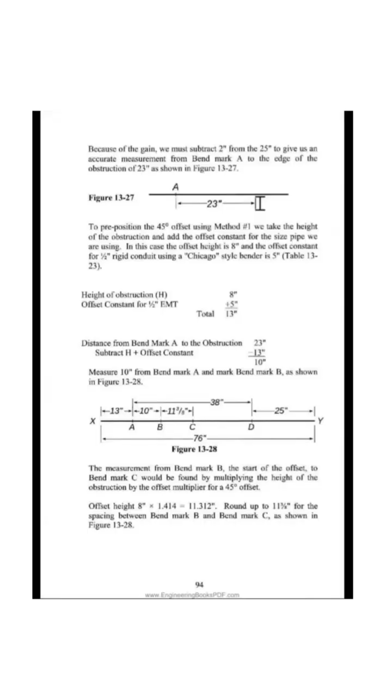Height of obstruction, h, 8, plus offset constant for 1/2 EMT, 5 inches, total 13 inches. Distance from bend mark A to the obstruction is 23. Subtract h plus offset constant, minus 13 inches, equals 10 inches. Measure 10 from bend mark A and mark bend mark B, as shown in figure 13-28.

The measurement from bend mark B, the start of the offset, to bend mark C would be found by multiplying the height of the obstruction by the offset multiplier for a 45 degree offset. Offset height 8 inches by 1.414 equals 11.312. Round up to 11 3/8, for the spacing between bend mark B and bend mark C, as shown in figure 13-28.

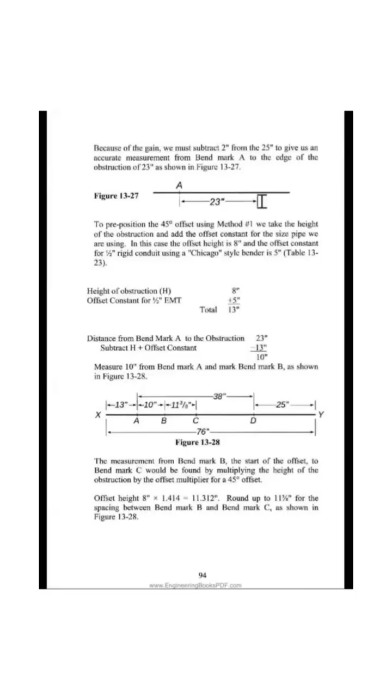To locate bend mark D, it will be easiest if we use mark A as a reference. The back-to-back measurement from the back of the first 90 degree bend to the back of the second 90 degree bend is shown in figure 13-24 as 37.

Between bend mark A and D there is one 90 degree bend and an offset. For the 90 degree bend we will subtract 2 inches for gain, but then we must add shrink for the 8 inch offset. Shrink for the 8 inch 45 degree offset would be 8 by 3/8, equals 24/8, or 3, for total shrink.

37 inches back-to-back distance, plus 3 shrink equals 40 inches, minus 2 inches gain equals 38 inches distance from bend mark A to bend mark D, as shown in figure 13-28.

We can, and should, always double-check our measurements before bending the pipe. The best way is to work backwards, or from the opposite end that we originally measured from.

Starting from box Y, the measurement to the back of the 90 degree bend is 22 inches plus 5 inches for take-up, then minus 2 inches for gain, or 25. From the end of the pipe at Y to bend mark D, as shown in figure 13-28.

From D to A, as shown in figure 13-28, is 38. Add 38 inches to 25 inches for a total of 63 inches from the end of the conduit at point Y to bend mark A.

From A to box X is 18 inches minus 5 inches of take-up, or 13. Add the 13 inches from X to bend mark A to the 63 inches measurement for bend mark A to the end of the conduit at Y, for a total length of 76, which was the calculated total length.

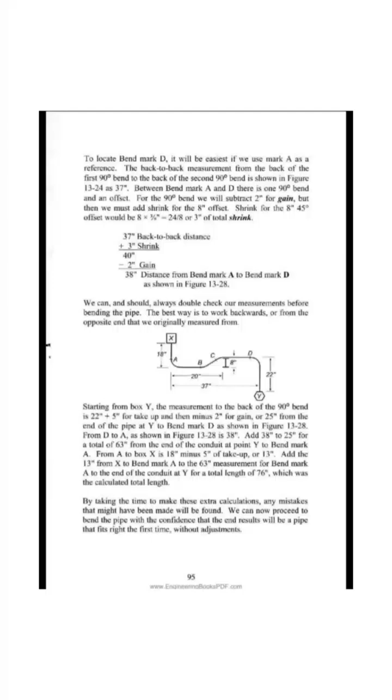The next problem will have a 4-bend saddle and two 90 degree bends. As with offsets, method #1 must be used for push-through bending 4-bend saddles. If necessary, review Chapter 9 for pre-positioning 4-bend saddles using method number 1. Lay out the pipe as indicated in figure 13-29.

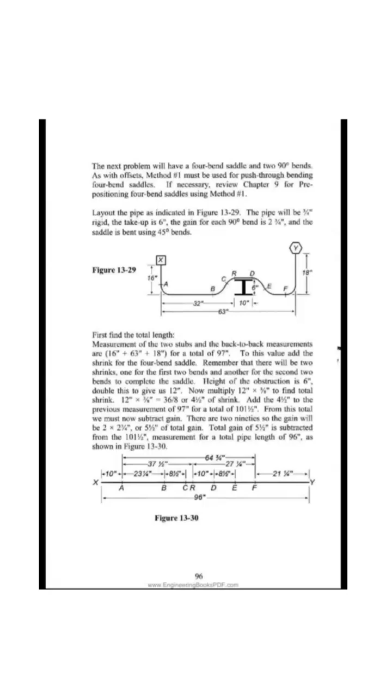The pipe will be 3/4 rigid, the take-up is 6 inches, the gain for each 90 degree bend is 2 3/4, and the saddle is bent using 45 degree bends. First find the total length.

Measurement of the two stubs and the back-to-back measurements are 16 plus 63 plus 18, for a total of 97. To this value add the shrink for the 4-bend saddle. Remember that there will be 2 shrinks, one for the first 2 bends and another for the second 2 bends to complete the saddle.

Height of the obstruction is 6 inches, double this to give us 12. Now multiply 12 inches by 3/8 to find total shrink. 12 inches by 3/8 equals 36/8, or 4.5 of shrink.

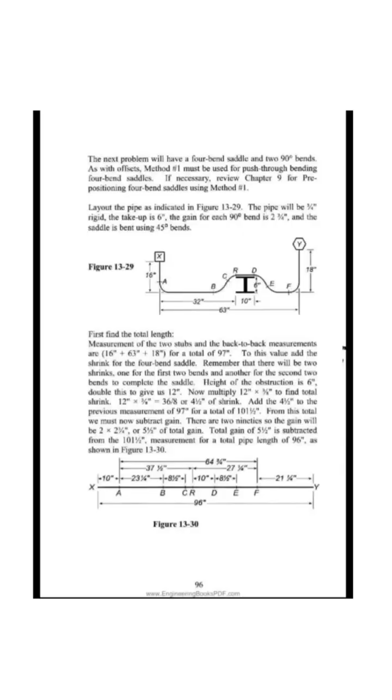Add the 4.5 to the previous measurement of 97 inches for a total of 101.5. From this total we must now subtract gain. There are 2 90s, so the gain will be 2 by 2 3/4, or 5.5, of total gain. Total gain of 5.5 is subtracted from the 101.5 measurement for a total pipe length of 96 inches, as shown in figure 13-30.

To locate bend mark A, subtract the take-up of the bender, which was given at 6 inches, from the desired stub length of 16.

16 inches minus 6 inches equals 10. The distance from the end of the pipe at box X to bend mark A is 10, as shown in figure 13-30. The distance from A to B, from A to the back of the bend, is 6 inches, take up minus 2 3/4 for gain.

6 minus 2 3/4 equals 3 1/4. The edge of the obstruction is 32 inches from the back of the bend. By adding the 3 1/4 to the 32 inches, we have a measurement of 35 1/4. That represents the distance from bend mark A to the edge of the obstruction.

35 1/4 minus 12 inches equals 23 1/4. This is the distance from bend mark A to bend mark B, as shown in figure 13-30A.

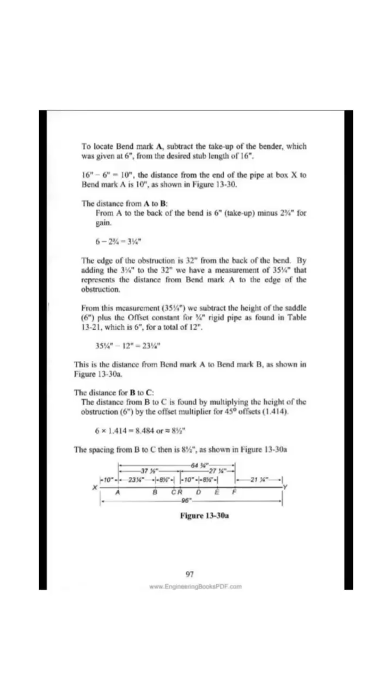The distance from B to C is found by multiplying the height of the obstruction, 6 inches, by the offset multiplier for 45 degree offsets, 1.414. 6 times 1.414 equals 8.484, or 8.5. The spacing from B to C then is 8.5, as shown in figure 13-30A.

The distance from A to R: previously we located the edge of the obstruction from bend mark A, which was 35 1/4. If we add the shrink for the first two bends of the saddle to 35 1/4, we have located reference mark R. The shrink is the height of the obstruction, 6 inches, multiplied by 3/8, equals 18/8 or 2 1/4. The distance from A to R then is 35 1/4 plus 2 1/4, equals 37 1/2, as shown in figure 13-30A.

Distance from R to D: this will be the width of the obstruction. The obstruction is 10 inches wide, so the distance from R to D is 10, as shown in figure 13-30A. Distance from D to E will be the same measurement as B to C, 8.5, as shown in figure 13-30A. Now locate bend mark F.

Bend mark F may be located from A, or from R to F. The back-to-back measurement for the two 90s is 63. It is 32 inches from the back of bend A to the edge of the obstruction, so it must be 31 inches from the obstruction to the back of bend F, as shown in figure 13-29.

If we add 2 1/4 of shrink for bends D and E to 31 inches, we get a measurement of 33 1/4. All we need to do now is subtract 6 inches for take-up from 33 1/4 to get a measurement of 27 1/4 from R to F, as shown in figure 13-30A.

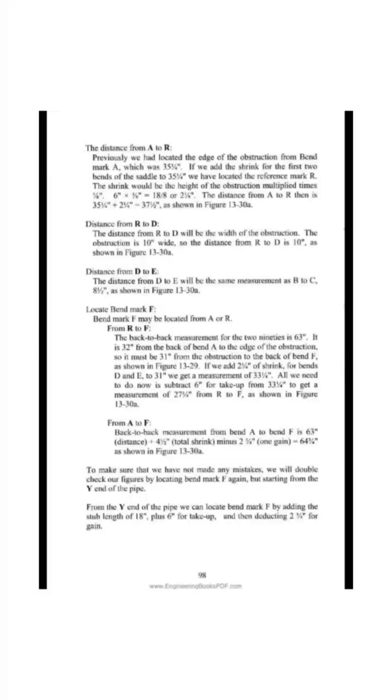18 inches plus 6 inches equals 24. 24 inches minus a gain of 2 3/4 equals 21 1/4. From the Y end of the pipe to bend mark F will be 21 1/4, as shown in figure 13-30A.

Adding this measurement, 21 1/4, to the measurement already found for the distance from A to F, 64 3/4, we get a total of 86. Add the 10 inches from bend mark A to the X end of the pipe to the 86, and we get the total pipe length of 96 inches, as shown in figure 13-30B.

Laying out a pipe with this many bends may seem very complicated at first, but with a little practice you will be able to do it rather easily. The key is a complete understanding of take-up, gain, shrink, and offset constant values.

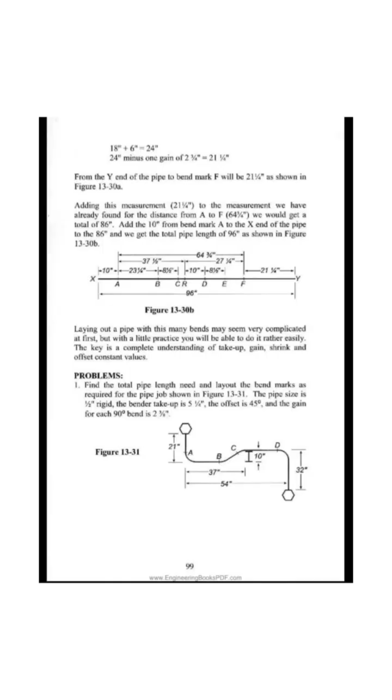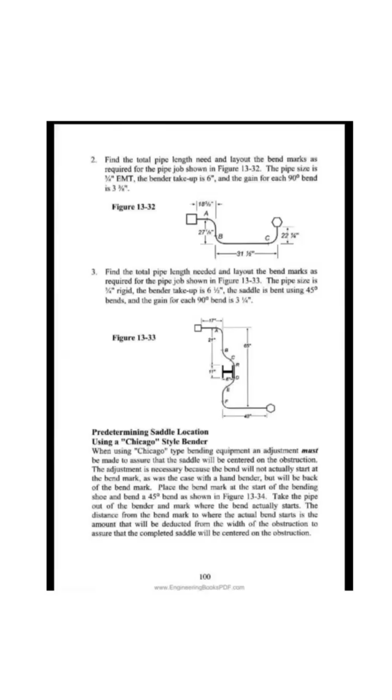Find the total pipe length needed and lay out the bend marks as required for the pipe job shown in figure 13-33. The pipe size is 3/4 inch rigid, the bender take-up is 6.5, the saddle is bent using 45 degree bends, and the gain for each 90 degree bend is 3 1/4.

Predetermining saddle location using a Chicago style bender. When using Chicago type bending equipment, an adjustment must be made to assure that the saddle will be centered on the obstruction. The adjustment is necessary because the bend will not actually start at the bend mark, as was the case with a hand bender, but will be back of the bend mark.

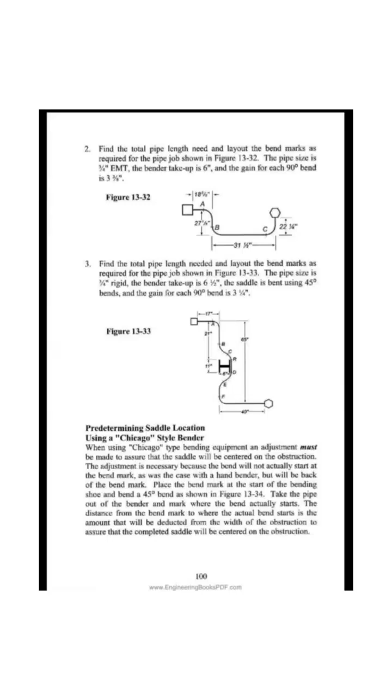Place the bend mark at the start of the bending shoe and bend a 45 degree bend as shown in figure 13-34. Take the pipe out of the bender and mark where the bend actually starts. The distance from the bend mark to where the actual bend starts is the amount that will be deducted from the width of the obstruction to assure that the completed saddle will be centered on the obstruction.

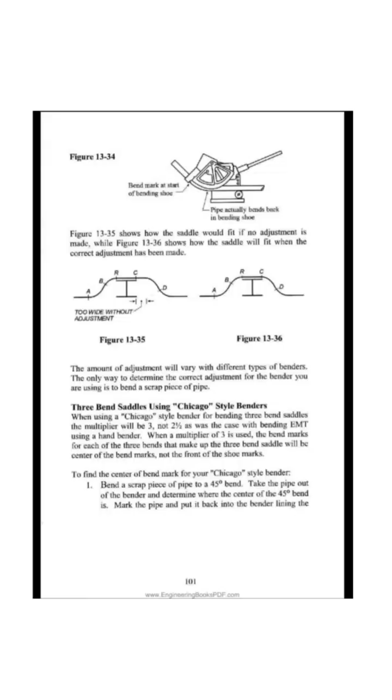Figure 13-35 shows how the saddle would fit if no adjustment is made, while figure 13-36 shows how the saddle will fit when the correct adjustment has been made. The amount of adjustment will vary with different types of benders. The only way to determine the correct adjustment for the bender you are using is to bend a scrap piece of pipe.

Three bend saddles using Chicago-style benders. When using a Chicago-style bender for bending 3 bend saddles, the multiplier will be 3, not 2.5 as was the case with bending EMT using a hand bender. When a multiplier of 3 is used, the bend marks for each of the 3 bends that make up the 3 bend saddle will be at the center of the bend marks, not the front of the shoe marks.

To find the center of bend mark for your Chicago-style bender: 1. Bend a scrap piece of pipe to a 45 degree bend. Take the pipe out of the bender and determine where the center of the 45 degree bend is. Mark the pipe and put it back into the bender, lining the original bend mark with the front of the bending shoe.

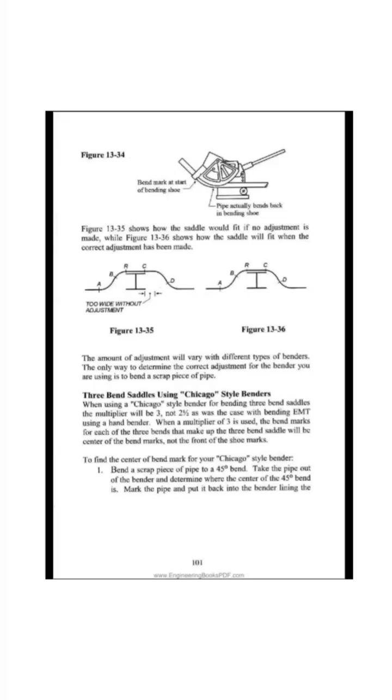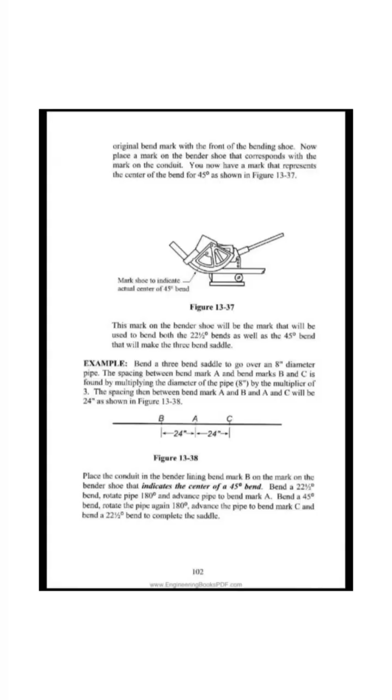Now place a mark on the bender shoe that corresponds with the mark on the conduit. You now have a mark that represents the center of the bend for 45 degrees, as shown in figure 13-37. This mark on the bender shoe will be the mark used to bend both the 22.5 degree bends as well as the 45 degree bend that will make the 3 bend saddle.

Example: bend a 3 bend saddle to go over an 8 inch diameter pipe. The spacing between bend mark A and bend marks B and C is found by multiplying the diameter of the pipe, 8, by the multiplier of 3. The spacing then between bend mark A and B, and A and C, will be 24, as shown in figure 13-38.

Place the conduit in the bender, lining bend mark B on the mark on the bender shoe that indicates the center of a 45 degree bend. Bend a 22.5 degree bend. Rotate pipe 180 degrees and advance pipe to bend mark A. Bend a 45 degree bend.

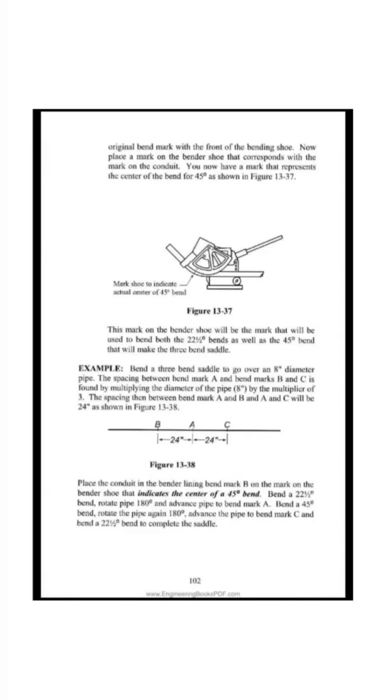Rotate the pipe again 180 degrees. Advance the pipe to bend mark C and bend a 22.5 degree bend to complete the saddle.

General Chicago-style bender tips. 1. To reduce the time it takes to convert fractions to decimal equivalents or decimal values to fractions, purchase a pocket calculator that will do fractions. To do fractions, the calculator must have an a b/c key.

To enter the fraction 3/8 as an example, you press the a b/c key, then the number 3 key, then a b/c again, followed by the number 8. The calculator will display the fraction 3/8. You can then multiply, divide, add or subtract.

2. When minimum length stubs are being bent, the shoe tends to creep and deform the ends of the conduit and threads. Screwing a coupling on the pipe stops the shoe from creeping forward and protects the pipe threads.

3. When bending offsets, the front of the bender can be temporarily elevated to gain necessary clearance for the bends.

4. Most bender shoes are made of cast aluminum and are easily pitted and gouged if foreign material gets between the shoe and the pipe. Keep the pipe clean and the shoe wiped down for longer shoe life.

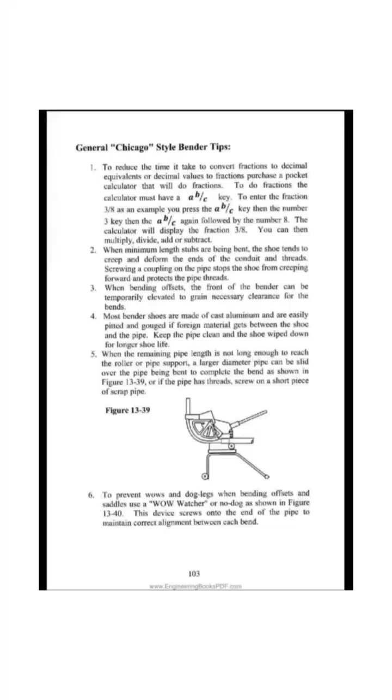To prevent wows and dog legs when bending offsets and saddles, use a wow watcher, or no-dog, as shown in Figure 13-40. This device screws onto the end of the pipe to maintain correct alignment between each bend.

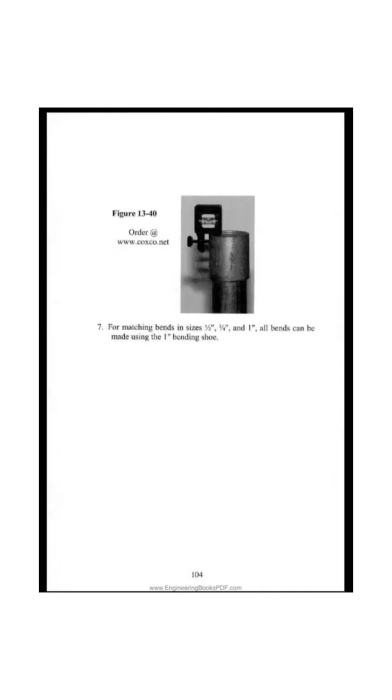For matching bends in sizes 1/2, 3/4, and 1 inch, all bends can be made using the 1-inch bending shoe. Hydraulic benders: for bending larger sizes of conduit, the hydraulic bender is indispensable.

Only by the addition of the hydraulic pump and cylinder to a bender frame is the necessary power available for bending rigid conduit up to 6 inches trade size. The typical completely assembled hydraulic bender is shown in Figure 14-1. Not only does it give the electrician extended bending capability, but also requires additional responsibility.

Hydraulic bending equipment represents a large initial investment of money, and the bender must be properly cared for if it is to last and give the service necessary to justify the cost. The bender frame, pivot shoes and bending shoes will require little more than occasional wiping down with a rag to remove the dirt and oil film.

The pump, cylinder and hydraulic hoses, however, will demand more attention. Hydraulic benders will come with quick disconnect couplers on the pump, cylinder and hoses. Each coupler end, whether male or female, comes with a dust cover as shown in Figure 14-2. The male coupler is on the left and the female coupler is on the right.

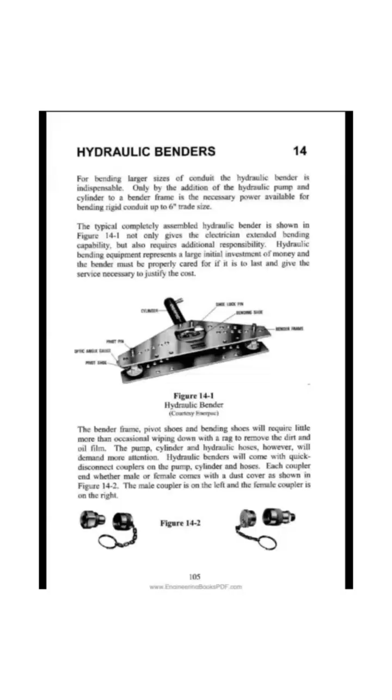These dust covers must be in place when the bender is disassembled to keep dirt and dust out of the couplers. Failure to keep the couplers clean will result in damage to the O-rings. Hydraulic pressure depends on the O-rings seating and sealing properly.

The pump, whether hand or electrically operated, should have the fluid level checked periodically. Low fluid pressure will keep the pump from developing its rated hydraulic pressure. When the fluid level is low and fluid must be added, use only approved hydraulic oil. Ordinary oil will cause damage to the pump assembly. Figure 14-3 shows a hand hydraulic pump, while Figure 14-4 shows an electric hydraulic pump.

Hydraulic benders have two types of bending shoes: one-shot and segment. The one-shot shoe has a full 90 degree radius. The conduit can be formed around the shoe to a full 90 degree bend without collapsing the walls of the pipe. One-shot benders require no new bending techniques.

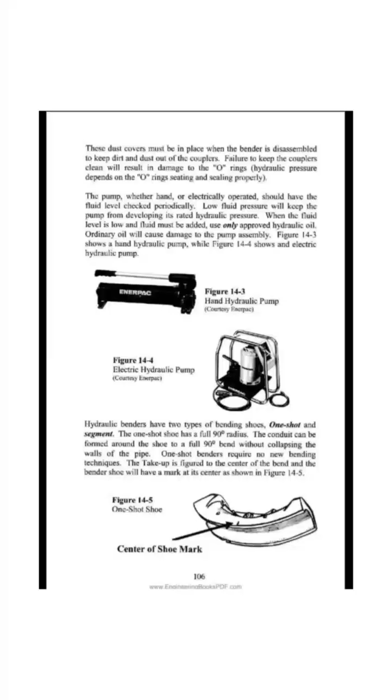The take-up is figured to the center of the bend and the bender shoe will have a mark at its center as shown in Figure 14-5. If the take-up values are not listed on the bender frame or on the storage box, scrap pipe can be bent and take-up values can be determined.

All the methods and layout techniques discussed for EMT and rigid can be used with a hydraulic bender and one-shot shoes. Offsets will have to be adjusted, less angle of bend, so the spacing between the bend marks are far enough apart to allow the first bend to be rolled 180 degrees and advanced enough to clear the pivot shoes. The pivot shoes are shown in Figure 14-1.

Segment shoes are shorter and have a very limited radius, as can be seen in Figure 14-6. 90 degree bends cannot be made in one operation with a segment shoe, as the conduit walls will collapse. Bends must be made in several steps, as few as 4 and as many as 30, to form a smooth radius. The segment shoe allows pipe to be bent to larger size radii.

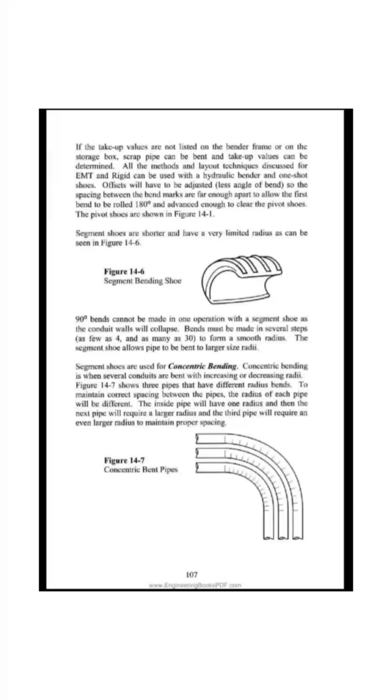Segment shoes are used for concentric bending. Concentric bending is when several conduits are bent with increasing or decreasing radii. Figure 14-7 shows three pipes that have different radius bends. To maintain correct spacing between the pipes, the radius of each pipe will be different. The inside pipe will have one radius, the next pipe will require a larger radius, and the third pipe will require an even larger radius to maintain proper spacing. Concentric bending is covered later in the text.

Accurate bending of large conduit is possible, but requires practice, patience and ability. With few exceptions, all formulas and bending techniques discussed to this point will apply. One-shot shoes can be used for segment bending, but are not as convenient.

Bending tips for rigid aluminum conduit: aluminum conduit is available in all trade sizes, 1/2 through 6. It is lightweight, corrosion resistant and has low ground impedance.

It is, however, difficult to bend consistently and accurately. Two pipes out of the same bundle can act differently when bent. Even if two pipes are bent using the same layout, they don't always come out exactly the same. Don't be discouraged, this is the nature of the metal, and it can't be helped.

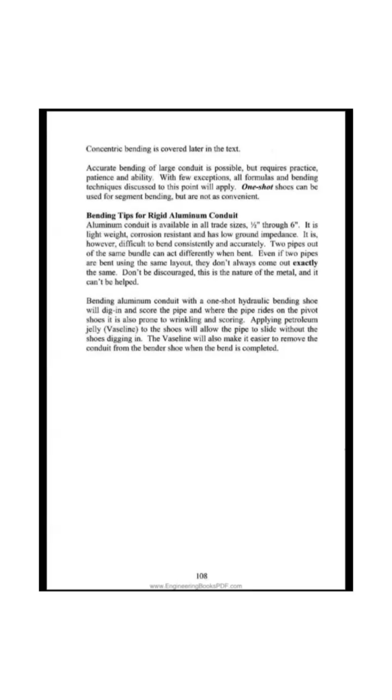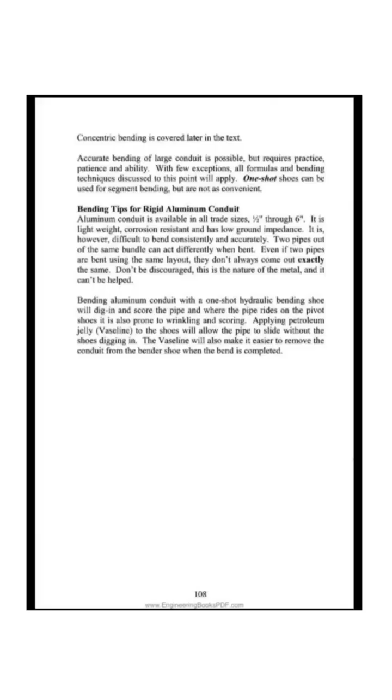The one-shot hydraulic bending shoe will dig in and score the pipe, and where the pipe rides on the pivot shoes it is also prone to wrinkling and scoring. Applying petroleum jelly, Vaseline, to the shoes will allow the pipe to slide without the shoes digging in. The Vaseline will also make it easier to remove the conduit from the bender shoe when the bend is completed.

The first step in segment bending is to determine the size of radius that is needed for a given pipe job. The larger the radius, the easier wire pulling will be. Space requirements and installation location will also be a factor that will govern the radius of a given pipe.

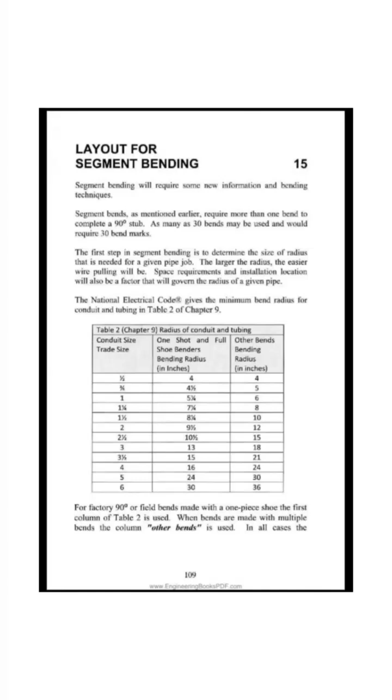The National Electrical Code gives the minimum bend radius for conduit and tubing in Table 2 of Chapter 9, Radius of Conduit and Tubing. For factory 90 degree or field bends made with a one-piece shoe, the first column of Table 2 is used. When bends are made with multiple bends, the column Other Bends is used. In all cases the minimum radius of bend is measured to the center line of the conduit or tubing.

If you don't have access to the table, a rule of thumb that is used to determine the radius for a given pipe size is 6 to 8 times the trade size of the conduit or tubing.

Notice in Figure 15-1 that the bent portion of the 90 degree bend makes up 1/4 of the circumference of a circle. Also note that 1/2 the diameter is called the radius, r. To find the circumference, c, of a circle, use the formula c equals pi times diameter. The Greek letter pi, which is the ratio of the circumference, c, of a circle to its diameter, d, has a value of 3.14. The formula can be rewritten as c equals 3.14 times d.

To find only 1/4 of the circumference, which is the amount of bent pipe, we can modify the formula. As pi, 3.14, is the ratio of the circumference to diameter of the circle, we can use half the value of 3.14, which is 1.57, and use the value of the radius instead of the diameter. The revised formula is 1/4 c equals 1.57 times radius.

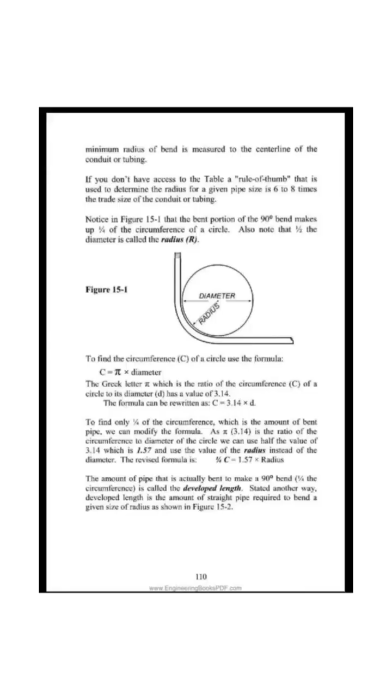The amount of pipe that is actually bent to make a 90 degree bend, 1/4 the circumference, is called the developed length. Stated another way, developed length is the amount of straight pipe required to bend a given size of radius, as shown in Figure 15:2. The developed length for a 90 degree bend is equal to 1/4 of the circumference. The formula for finding developed length for 90 degrees then is developed length equals 1.57 times radius.

As indicated in Figure 15:3, the radius is measured on the inside of the bend. The radius plus the outside diameter of the pipe is just like take up, as described in earlier chapters. Note: a full list of outside diameters for all pipe sizes is found at the back of the book. The amount of the radius plus the outside diameter subtracted from the desired stub length will give us the start mark. The start mark is used for layout only and is not a bend mark.

Example: to locate the start mark for laying out a 4 inch rigid conduit with a 48 inch stub that has a radius of 24 inches, we add the outside diameter, OD, for 4 inch pipe, which is 4.5, to the 24 inch radius and subtract that value from 48, the desired stub length. Start mark equals 48 minus (4.5 plus 24), start mark equals 19.5, as shown in Figure 15:4.

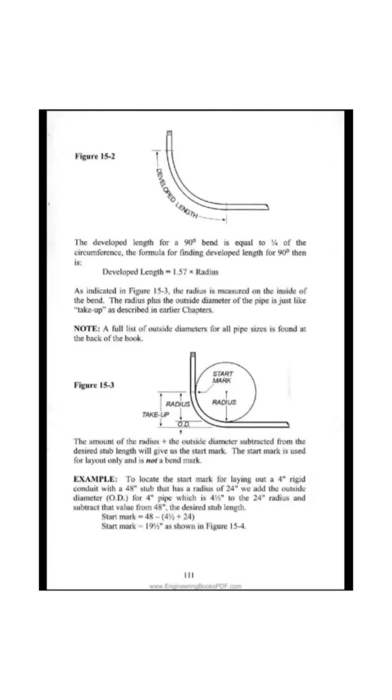The start mark, as well as all other bending marks, should go at least halfway around the pipe. If the marks are too small, they will be covered up by the bending shoe and create a problem when the bending is started. As more than one bend must be made to complete the 90 degree stub, the next step then is to determine the number of bends to use.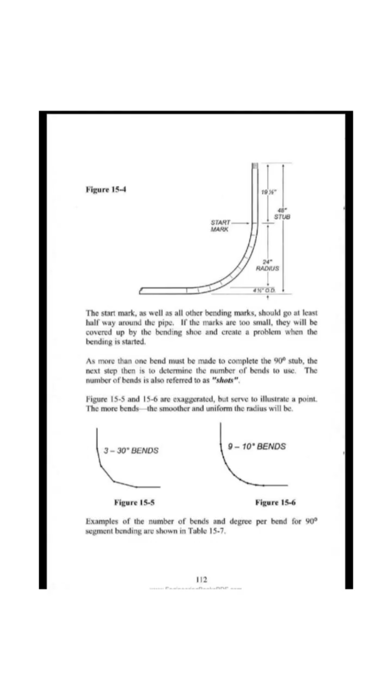The number of bends is also referred to as shots. Figures 15:5 and 15:6 are exaggerated, but serve to illustrate a point: the more bends, the smoother and uniform the radius will be. Examples of the number of bends and degree per bend for 90 degree segment bending are shown in Table 15:7. Normally the degrees per bend should not be less than 3 degrees, 30 shots, nor more than 6 degrees, 15 shots, for a smooth and even radius bend.

Any degree between 3 and 6 degrees can be used. An angle finder or digital level will be necessary if accurate results are to be expected. Remember, the more bends, the smoother the 90 degree stub, and the easier wire pulling will be.

Once you have decided on the number of bends to be used, shots, the number is divided into the developed length, the amount of straight pipe needed to bend a given radius, to give us the spacing between the bend marks, as shown in figure 15:8. Spacing between bend marks equals developed length divided by number of bends.

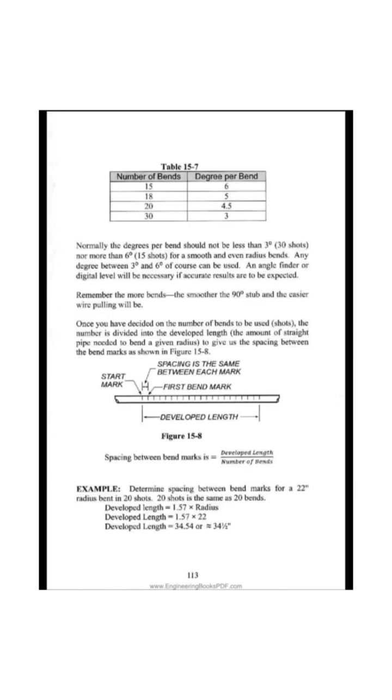Example: determine spacing between bend marks for a 22 inch radius bent in 20 shots. 20 shots is the same as 20 bends. Developed length equals 1.57 times radius. Developed length equals 1.57 times 22. Developed length equals 34.54, or 34 1/2.

To find the spacing between the bend marks, divide the developed length by the number of bends, shots. Spacing equals 34.54 divided by 20. Spacing equals 1.727, or equals 1 3/4 between the bend marks.

Now that the new terms and formulas are understood, let's put it all together and lay out 2 segment bends. Example number 1: lay out a 3 inch rigid pipe that will have a radius of 24 and a 90 degree stub length of 42. The pipe will be bent in 20 shots of 4.5 degrees per shot.

Find developed length. Developed length equals 1.57 times radius. Developed length equals 1.57 times 24. Developed length equals 37.68, or equals 37 5/8.

2. Determine the location of the start mark. Start mark equals stub length minus radius plus pipe OD. The OD for 3 inch rigid is 3.5. Start mark equals 42 minus 24 plus 3.5. Start mark equals 42 minus 27.5. Start mark equals 14.5.

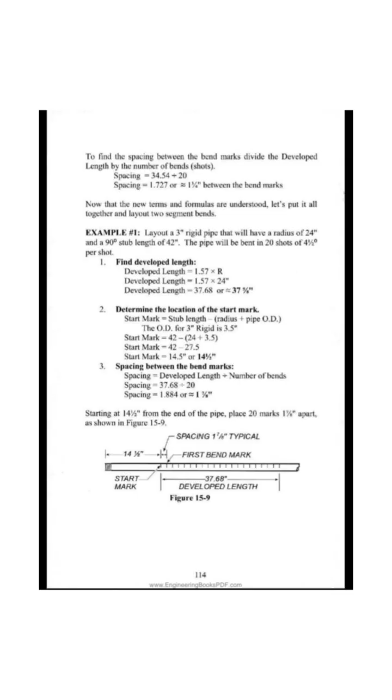3. Spacing between the bend marks. Spacing equals developed length divided by number of bends. Spacing equals 37.68 divided by 20. Spacing equals 1.884, or equals 1 7/8. Starting at 14.5 from the end of the pipe, place 20 marks 1 7/8 apart, as shown in figure 15:9.

4. Conduit is placed in the bender and bent 20 times. 20 bends of 4.5 degrees will equal 90 degrees. Remember, the start mark is not a bend mark. Complete bending instructions are covered in the next chapter.

Example number 2: lay out a 4 inch pipe that has a stub height of 51, a 30 inch radius, and bent in 15 shots, 6 degrees per shot. 1. Find the developed length. Developed length equals 1.57 times 30 inch radius, developed length equals 47.1.

2. Locate the start mark. Start mark equals desired stub height, 51, minus the radius, 30, plus OD of the pipe, 4.5. Start mark equals 51 minus 30 plus 4.5. Start mark equals 51 minus 34.5. Start mark equals 16.5. Locate the start mark 16.5 from the end of the pipe.

3. Find spacing between the bend marks. Spacing equals developed length divided by shots, 15. Spacing equals 47.1 inches divided by 15. Spacing equals 3.14, or equals 3 1/8. 4. Starting at the start mark 16.5 from the end of the pipe, place 15 marks 3 1/8 apart on the pipe. The pipe is now ready to bend.

Problems. 1. Find the start mark and bend spacing for a 2.5 conduit with a 24 inch radius, a 62 inch stub, using 20 shots. 2. Find the start mark and bend spacing for a 4 inch pipe with a 40 inch radius, a 68 inch stub, using 30 shots. Of the several methods of layout in use for segment bending, the author has elected to use the one he feels is easiest to remember.

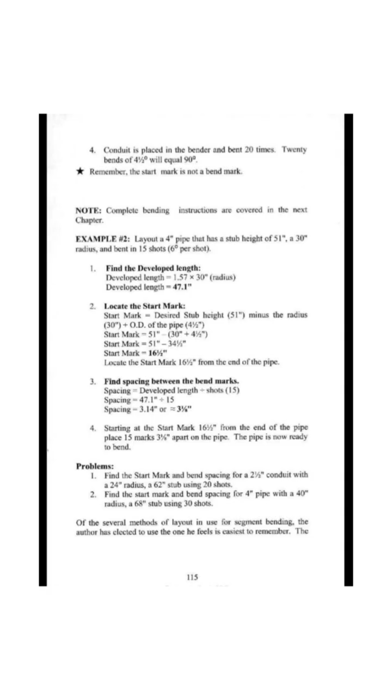The success of the method described, as with any method or technique, depends on the electrician's mechanical ability and the equipment being used. Note: no matter which bending method is used, if for some reason your stub lengths are consistently too high or too low, make certain you are performing the bending procedures correctly, then adjust your layout to compensate.

It is extremely important that you check your developing stub length and angle of bend when you have 4 or 5 shots left to bend. Corrections or adjustments can be easily made during these last few bends to bring the stub to the correct length, or to complete a full 90 degree bend.

If the stub is coming up long, bend more degrees for each remaining shot to bring it up to a full 90 degrees without adding additional stub height. If the stub is coming up short, lengthen the spacing between the bend marks to pick up the necessary added stub length without bending over a 90 degree bend.

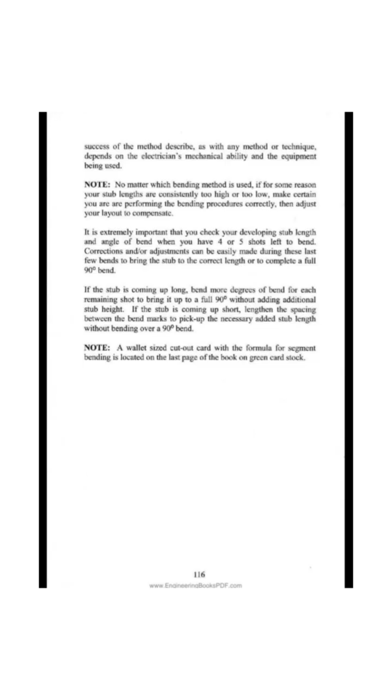Note: a wallet-sized cutout card with the formula for segment bending is located on the last page of the book, on green cardstock.